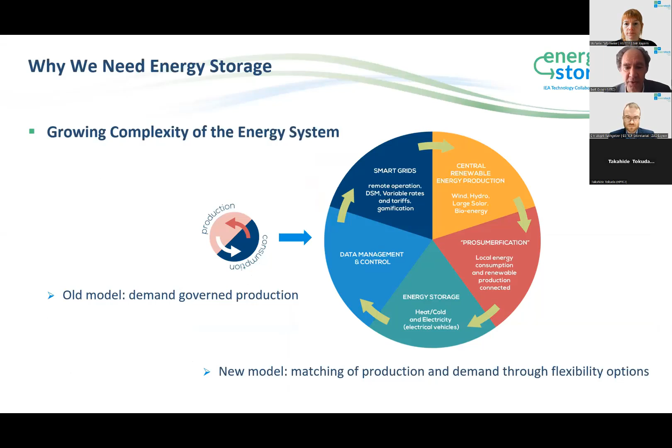The result is that today energy storage gains in value, and as we all know, as something gains in value, it also attracts more scientific, public, and luckily also political interest. So we will evolve to a more complex energy system. A system coming from production follows demand to a system where flexibility is key, and where storage is at the core of this new energy system.

We have batteries, we have water boilers, so most people say, what's the problem? Aren't we then ready for this new, more complex energy system? Or are we still facing some challenges? And indeed, there are still a lot of challenges. Here, I will mention some technical challenges, just a couple of them. If you look at the more technology-specific challenges, independently of which type of storage we are using, we have a lot of challenges related to the compactness of storage. We have challenges related to charging and discharging capacity, to safety aspects.

Even this week, I saw some pictures of burning cars, the problem of the lithium battery. We are talking about sustainability and the discussion on rare materials, the mining of the materials. We are talking about circularity, so a lot of challenges ahead. There are also challenges related to the optimization of the grid infrastructure, where storage can play a major role, if you look at demand response and at the bidirectional communication which is needed, as storage is part of the energy system.

And of course, we all know the Internet of Things is growing, artificial intelligence becomes part of our daily life. So also here, it gives us extra possibilities for the integration of storage into the energy system. And last but not least, the whole flexible sector coupling, where electricity meets heat, where electricity meets transport, where heat meets transport, and vice versa. So a lot of challenges ahead of us.

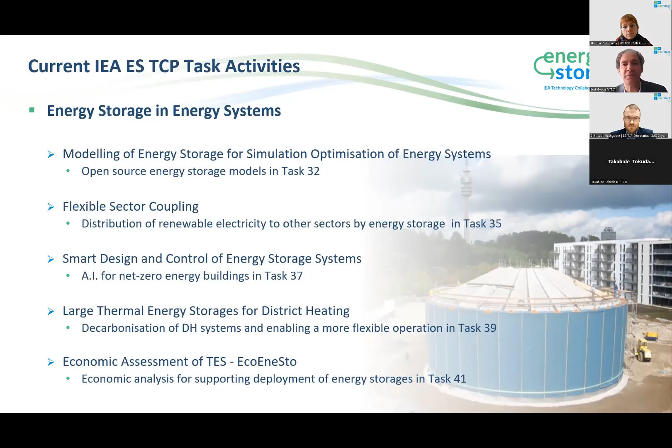Task 39 goes on large thermal energy storages for district heating, and it's about the decarbonization of district heating systems and the enabling of a more flexible operation. And last but not least, task 41 is about the economic assessment of thermal energy storage. EcoEneSto is the title, so it's about economic analysis for supporting the deployment of energy storage.

We also have 4 tasks related to technology improvements. One of them is the comfort and climate box, where we bring together heat pump and storage. It's task 34, and it's also task 55 of the heat pump technology TCP. Another one is task 36, where we look to Carnot batteries, and we go for looking for an inexpensive site-independent storage of electric energy by use of the Carnot batteries.

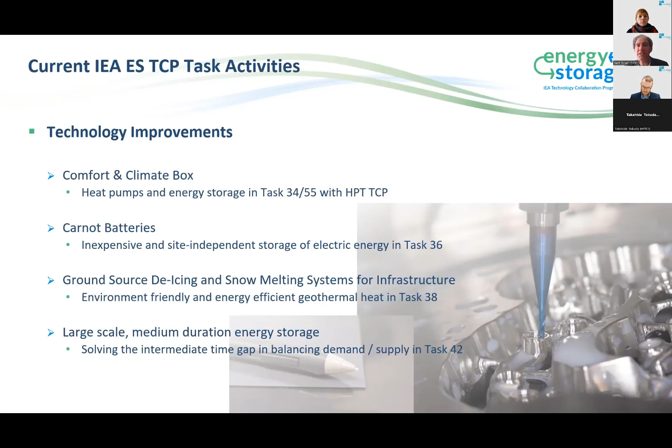Task 38 is on ground source de-icing and snow melting systems for infrastructure, where we try to use geothermal heat in an environmentally friendly and energy efficient way. And task 42 is about large-scale, medium duration energy storage, where we try to solve the intermediate time gap in balancing demand and supply. And our last current task is task 40.

It's related to materials and components, and we look there for compact thermal energy storage materials within components, within systems. It's about PCM and TCM development and standardization. And here it's also cooperation with the solar heating and cooling TCP.

As mentioned in our mission, we want also to disseminate all the results from those tasks as much as possible. And one of the means is the Enerstock conference, as already explained at the beginning of this presentation. It's a triennial Enerstock conference, and this one, online for the first time, is also one of the means to disseminate our results.

And we also promote the active participation of all experts in symposia, workshops, webinars, and we have our own online seminar series. So every month we try to have an online seminar.

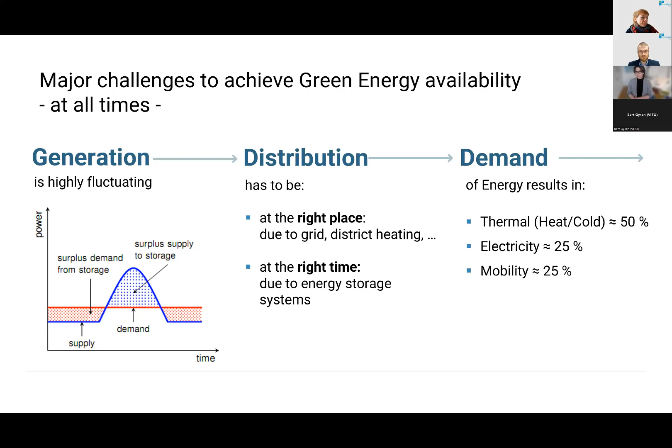And so, which is also an important point here, which is stressed: energy is not basically electricity, as we all know. The majority is just thermal energy, which is about 50%. And so this is a very important point. I'm telling investors that the solution to green energy availability is energy storage systems, because they are key in matching supply and demand so that you have the energy available when needed.

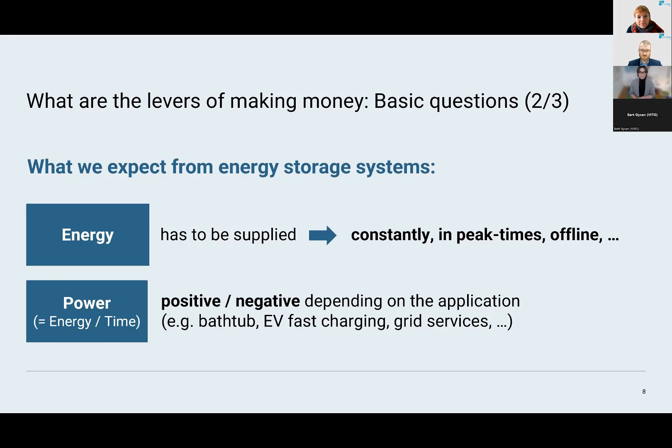So what is the second important point? What do we expect from energy storage systems? There are 2 things. The one is energy. Of course, we want to have it constantly at peak times. And the other thing is we need the power. We want to charge our cars fast. So we need some kind of buffer batteries. And so here are the examples that you have, a bathtub, etc.

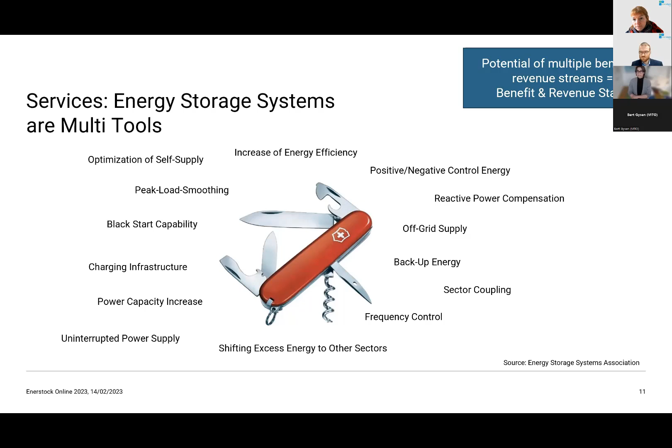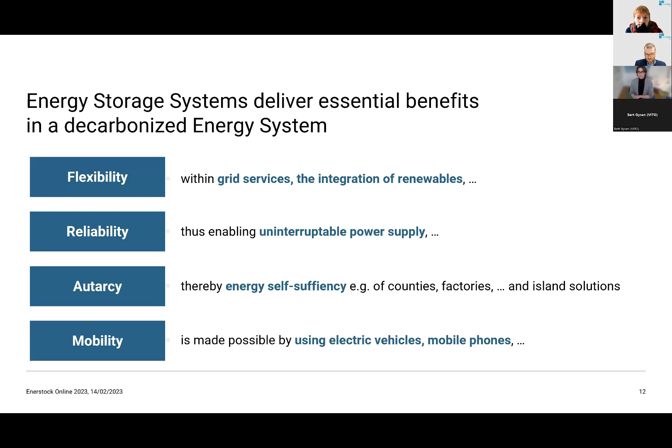So which actual services and benefits can be identified? I think you might know the Swiss pocket knife. And so this is the great thing about energy storage systems, because they are multi-tools. And this is also the good thing, coming back to business cases: you have potential for multiple benefits and revenue streams. So at one glance, there are lots of benefits delivered by energy storage systems. You have the flexibility, you have the reliability, you get also autarky, and of course mobility: we couldn't use electric vehicles or mobile phones without batteries.

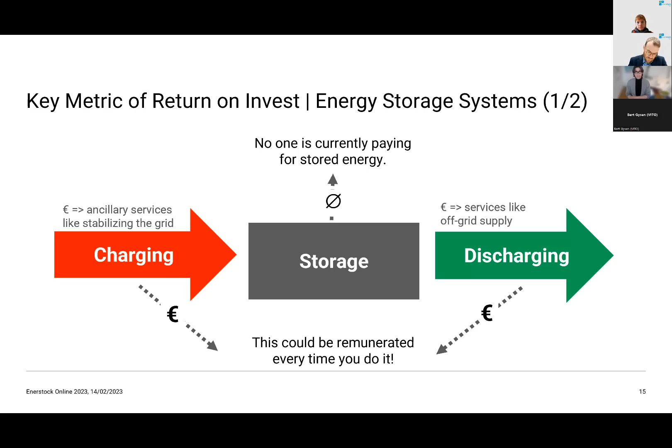So when do we make money from energy storage? It's basically the 3 things. You make money by charging, and you make money by discharging, and in the optimal case it's a circle. So when you have discharged, you're charging again. At the moment, we do not have a business case for just energy being stored. You get money either when it's charged, maybe for ancillary services like stabilizing the grid, or, of course, for discharging the energy.

Maybe this is just a very simple overview, but I think it explains pretty well what long duration means. If you have a low frequency in your charging process and in your discharging process, you need to have a really value-for-money or inexpensive storage so that you have a proper return on investment.

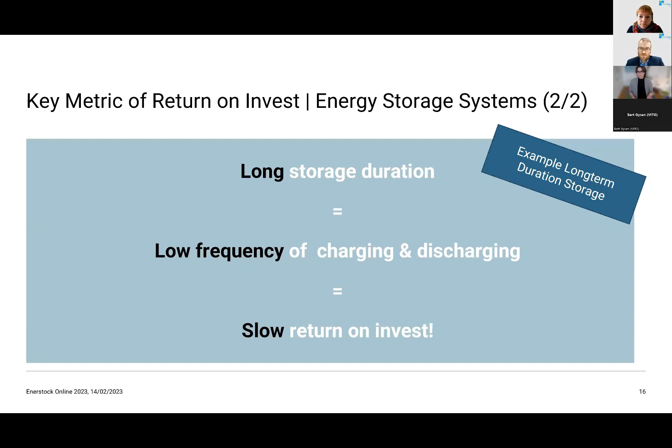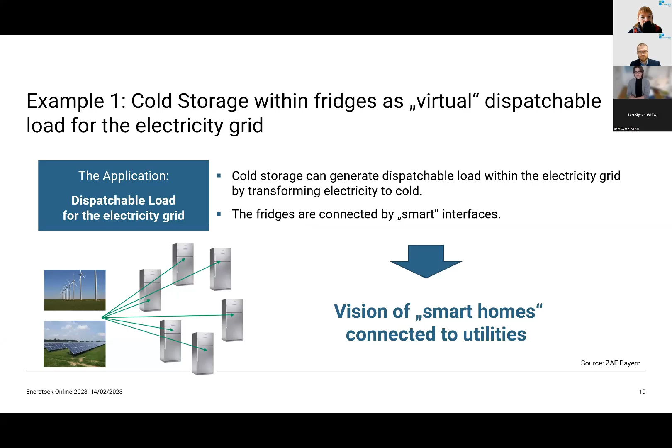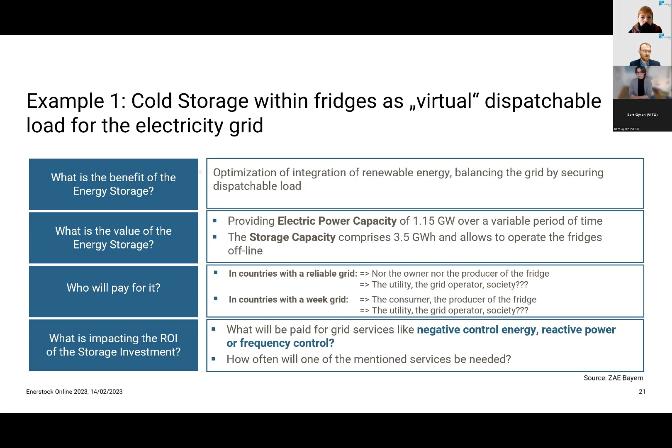So then we come to crucial questions. What is relevant from benefit to business case? Those are 4 questions. I give examples here. For example, you see here a really deep tech, great vision: the vision of smart homes connected to utilities. We have something like 40 million fridges in Germany. And if you would connect them with quite inexpensive cold storage, you could provide a lot of electric power capacity of over 1 gigawatt. The thing is, you have to ask the question, who will pay for it? At the moment it's quite difficult: the owner doesn't pay, nor the producer of the fridge.

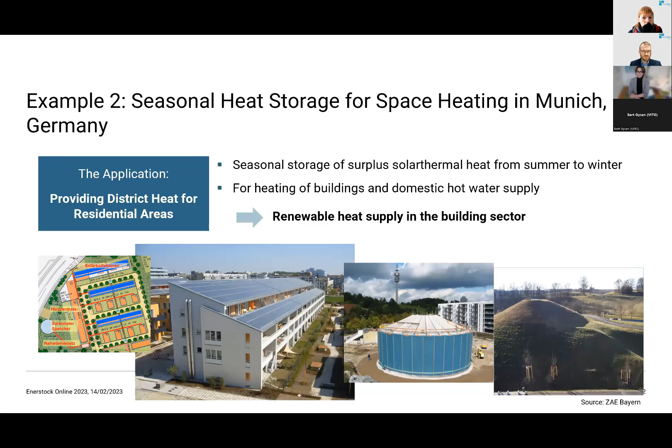So I've brought a second example, and Bert also has shown this as one of the working groups. It's a seasonal heat storage for space heating in the north of Munich. This gives a really good example. This is not really deep tech, but it's actually working. You have a heat and domestic hot water supply for 320 apartments, and get at least partly autarky by having this heat storage.

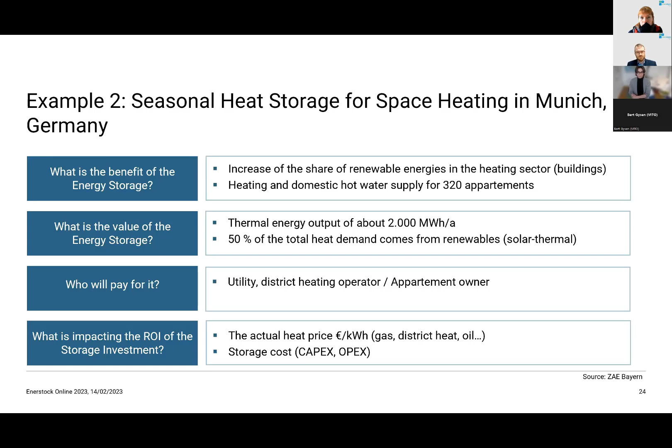All right, so here, this is from benefit to business case. Again, a quite important slide, because the application and its usefulness is key from a customer perspective, because ultimately the technology needs to match the application. So this is always the thing to have in mind. It's the triad: what's the application? What technology matches the application needed? And so you can quantify and qualify the concrete benefits.

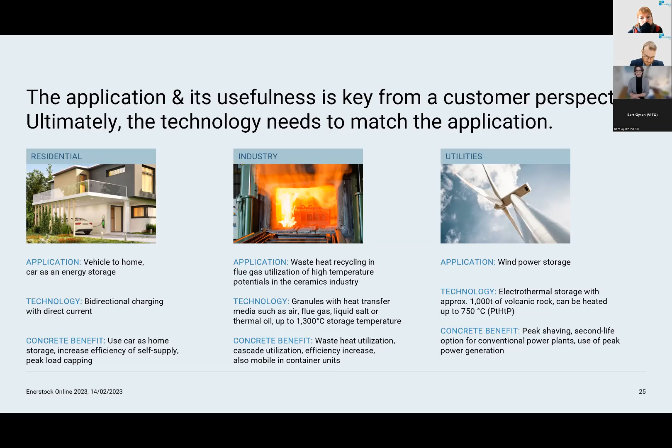Yeah, having it at one glance, the return on invest, of course, depends on the number of charging, discharging cycles per time. And then always think energy storage within applications. Only then we can quantify the value of energy storage.

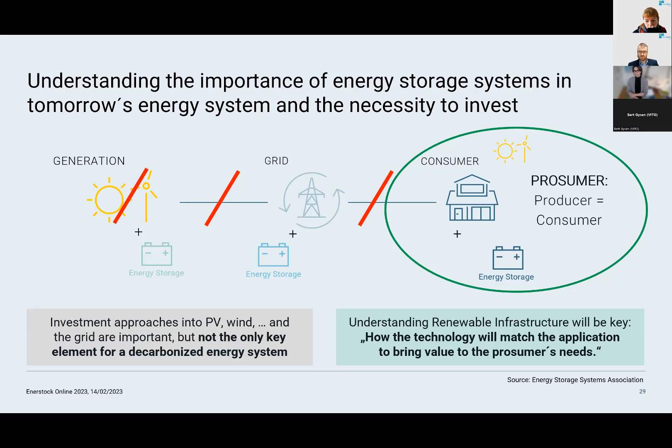So that exactly brings that what I've told before. How will the technology match the application to bring the value to the prosumer's need? So, and here, maybe we also heard it in the keynote from Bert. The ultimate goal is just to get a decarbonization in combination with security of supply and thus energy autarky at stable cost. And there is a multitude of energy storage opportunities with high investing potential in tomorrow's energy system. So there is a huge market in the industry and in the commercial area.

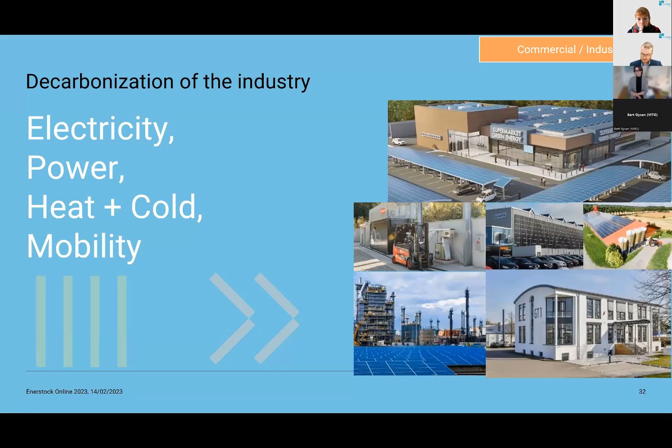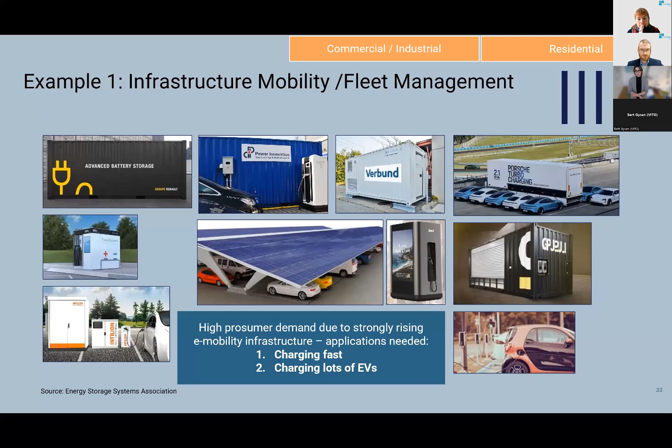So we've heard a lot about electricity, but now the thing is how to get the power you need and the process heat, etc., the heat, the cold, the mobility concepts. And so this is with the strongly rising e-mobility infrastructure. So there are a lot of startups, joint ventures like Numbat, Jolt, where they make deals with retailers, how you charge your cars A, fast, and B, how you get the possibility to charge your electric vehicles with green electricity.

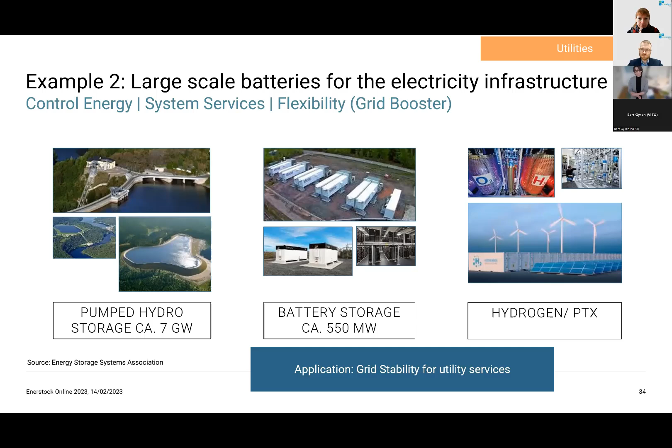So another example of the application grid stability for utility services is, of course, you have big pumped hydro storage and you have battery storages. We will hear a keynote from Fluence later on, and of course you have power to X and hydrogen as a good energy storage system as well. So here, this is one example for a grid booster concept in Germany. And so there are many more investments to come like those stabilizing the grid.

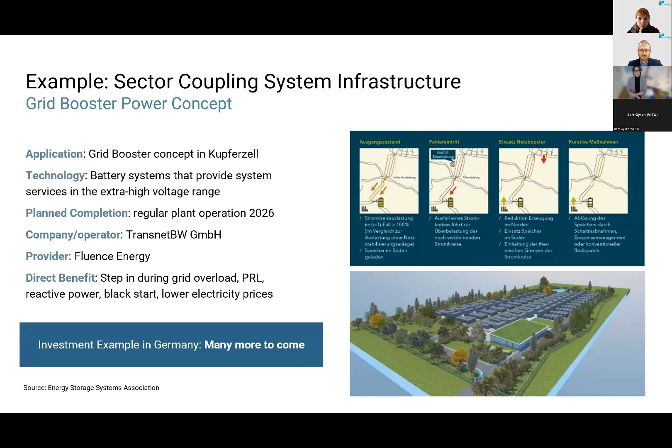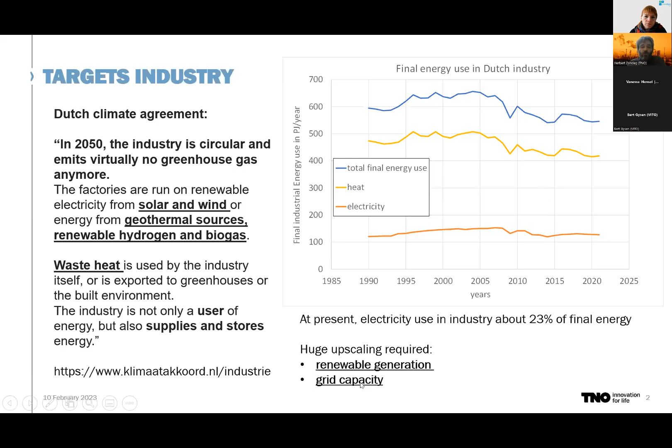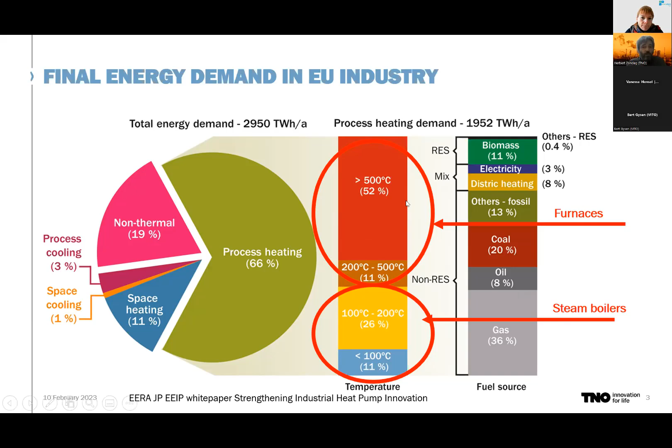Now let's have a look at the industrial heating demand. So over here you see the final energy demands in the European industry, and we can see that most of this energy demand, as expected, is related to process heating. And typically, in the order of 1/3 is below 200 degrees, mainly provided by steam boilers, industrial steam, and 2/3 is above 200 degrees, mainly provided by furnaces. So all this heat would then have to be electrified, and for low temperatures one of the interesting options is industrial heat pumps. For high temperatures it would be more direct electric heating.

So what does that mean for heat storage? Well, energy efficiency is a requirement for electrification of industrial processes. As we have just seen, we need huge upscaling, also in renewable capacity availability. Since renewable availability will be a limiting factor in the end, we need to be efficient using this energy.

We will have grid capacity constraints, and also there's the issue of competitiveness with countries having cheaper solar and wind. So also a good reason to be energy efficient. So on one hand, we need energy efficiency to reduce energy use. And important topics there are, for instance, waste heat recovery and reuse, so to minimize the amount of waste heat.

And we can do that by, for instance, short-term heat storage applied to batch processes, so we can store the heat of one batch, upgrade it with a heat pump, and use it in another batch. Or preheating of batches, also requiring heat storage. Also, if we want to use waste heat to be provided to district heating, we would have long-term storage connected to this district heating system to do this in an optimal way.

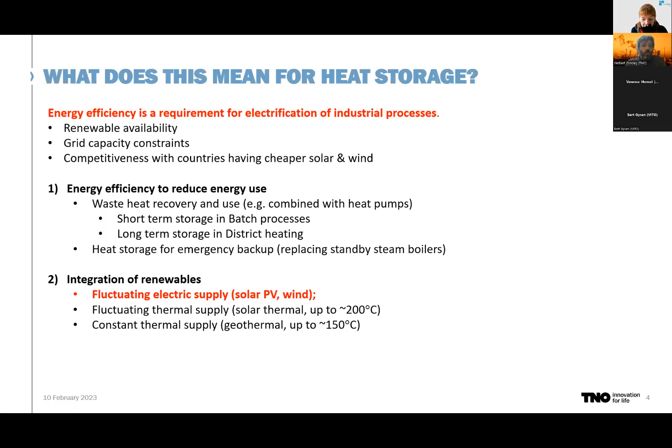And if we look at renewables, that will be first and foremost power to heat, converting fluctuating electric supply from solar PV and wind. In addition, we will have in Europe some solar thermal supply, but probably not much in the Netherlands or in the north. And we will have constant thermal supply from geothermal. That also requires storage if you want to match it to fluctuating thermal demand in processes. So we see a lot of roles here for heat storage.

Now, what options do we have for heat storage? Well, this is just a very basic slide. So over here we have temperature range, different types of heat storage: sensible, phase change, so storing in a melt solidification, sorption heat storage, thermochemical, and chemical heat storage.

If we look in terms of TRL, we can see that sensible heat storage is quite well developed and is applied on a significant scale in the market already. That can relate to liquids, so heat storage in water, thermal oil, molten salts, but also solids going to much higher temperature, to 800 degrees. The other types of heat storage are still at lower TRL.

We are doing work, among others, on PCM heat storage, sorption heat storage, where hydroxides can provide high temperature heat, and chemical heat storage. And chemical heat storage is, among others, related to renewable hydrogen and fuels derived from renewable hydrogen, such as ammonia, or redox heat storage.

This redox heat storage, I'd like to say a few words on, because I think it's an interesting technology. So basically, what we have is metal oxide powder, for instance, iron oxide. We can reduce that to pure iron by renewable hydrogen and renewable heat provided from power to heat. And this iron powder we can store for whatever time we want. And if we need the heat, we can combust the iron powder, providing heat to our required applications.

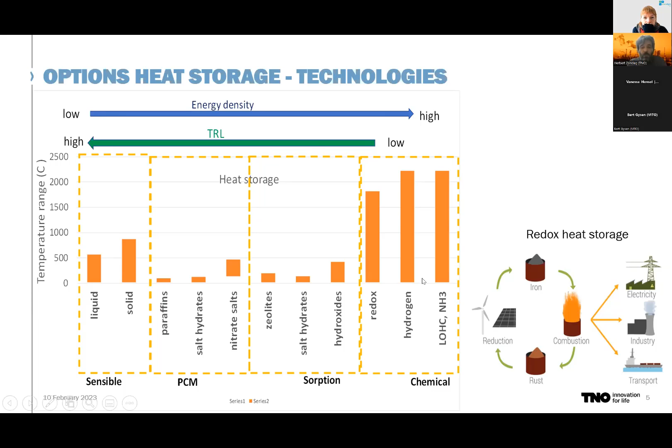One of the topics we are working on at TNO related to energy efficiency is this example of industrial steam storage. So over here, it's a PCM heat storage. The purpose of this PCM heat storage is heat recovery from exothermal batch processes. So we recover this heat, store it in the PCM. When needed, we use this charged PCM to be discharged producing steam, low pressure steam that can be upgraded with steam compression.

Over here you see the storage. Within the storage we have a large number of tubes, as also shown over here. And these tubes are filled with phase change material. The phase change material used as storage material gives a good match with the generation of steam at a constant pressure and temperature. So PCM and steam are an interesting match.

We use adipic acid in this material, melting at 150 degrees. We can charge this by low pressure steam coming from the exothermal batch process. And if we discharge it, we flow a water film around the surface of the tubes. The water evaporates, producing low pressure steam that we can upgrade with this steam compressor.

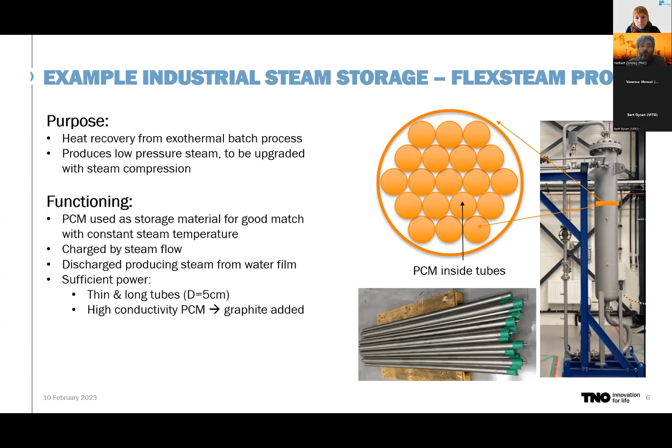Another type of project is related to this integration of renewable electricity. And that is something we looked at in the SPOT project, trying to answer the question how much generation, conversion, and storage is needed to cover industrial heat demand fully with renewable electricity, just as a kind of limiting case to get some feeling for order of magnitude.

So we made some assumptions regarding the industrial heat demands. So it has to be met fully by renewable electricity from solar and wind. And the demand itself is constant over the year. So we have a fluctuating supply and a constant demand. So how much storage capacity do we then need?

I'm not sure if everybody can see my pointer.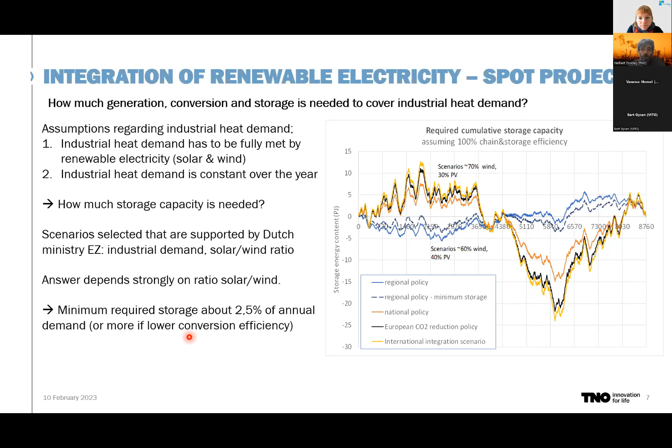So from this information, we try to calculate the costs of such an energy system. So what we did is we compared different conversion and storage routes. So to explain, suppose you want to go from electricity to heat, you can store the electricity and then discharge the storage to provide electricity to a heat pump that we can use to provide the heat.

Or we can have the electricity converted to hydrogen, store the hydrogen, combust the hydrogen, and thereby provide the heat. So we have different conversion and storage routes. There are a lot more, but these are just two examples. And over here you see the different conversion and storage routes that were investigated. We have two cases: below 200 degrees, because there we can use heat pumps, and above 200 degrees where we cannot.

What we saw is that the total costs to provide the Dutch industry with this electricity for heating strongly varied, depending, first of all, on the selected conversion and storage technology. Secondly, on required infrastructure, whether it's a hydrogen network or an electricity grid, the electricity grids being a lot more expensive for a given power than the hydrogen network. And also the conversion efficiencies, because if we have a lower conversion efficiency, it means we need more renewable generation, which comes at a cost.

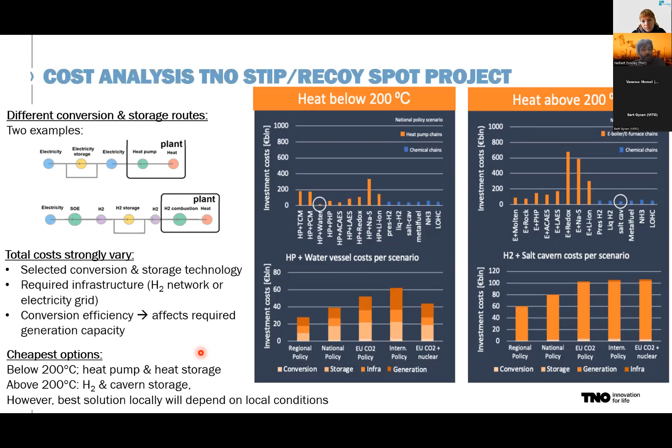So comparing all these options, what we saw is that the cheapest options were, below 200 degrees, to provide this heat by means of a heat pump and heat storage, and above 200 degrees, use hydrogen and cavern storage. However, these are two generalized solutions. What is the best solution in an individual case will depend on local conditions. And how important these local conditions are is also illustrated a bit by the next slide.

These are current developments in the Netherlands. What we see is that the start of electrification in the Netherlands is presently hampered by grid capacity constraints. If you look at this map of the Netherlands, the yellow parts have a risk of transport constraints. Orange is structural congestion announced, and red is structural congestion already there and no new transport requests are possible. So we see that there is a lot of pressure on the electricity grid at the moment, and we still have to expand towards power to heat.

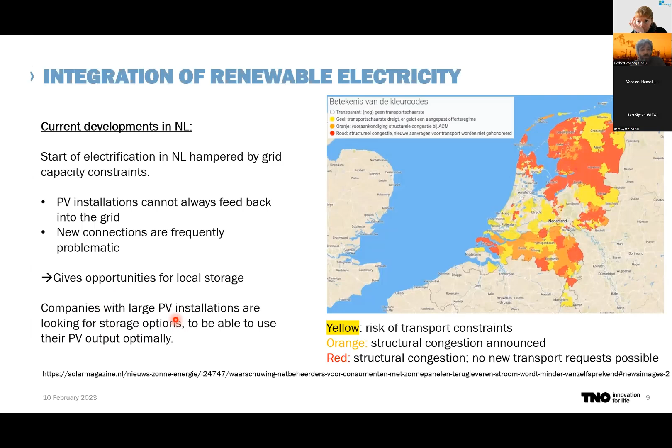However, what we also see is that this already triggers questions on heat storage. For instance, we sometimes see small companies having large PV installations who cannot feed back their electricity to the grid. And we get questions on whether it is possible to use this electricity from the PV, for instance in weekends when the production is not running, and store that, for instance in heat storage, so that we can supply it again during the week. So already here, these grid constraints trigger questions on storage.

So, conclusions. A large increase in industrial electricity use is expected because of the industrial electrification that is coming. That will be in different forms: industrial heat pumps, direct electric heating. By industrial heat pumps, I mean heat pumps going up to 150, 200 degrees, upgrading waste heat to process heat. Direct electric heating for higher temperature processes, and also mechanical drive. Well, for heat pumps and direct electric heating, we will need storage to integrate it properly.

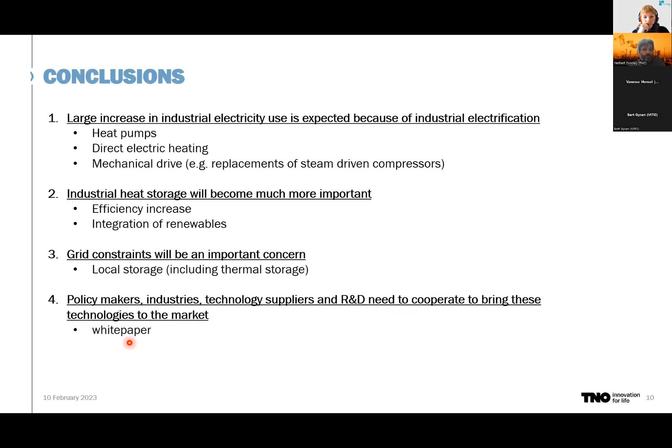Then industrial heat storage will become much more important because of efficiency increase and integration of renewables. Grid constraints will be an important concern, but also give opportunities for local storage, including thermal. And policymakers, industries, technology providers, and R&D need to cooperate to bring these technologies to the markets. And therefore, in EERA, a white paper was written by, among others, TNO, but also several other institutes.

Well, I will not go into all of them. We also have technical and business recommended actions, and those can be found in the white paper. And over here, you see the link to the white paper for whomever is interested. And that's what I wanted to say.

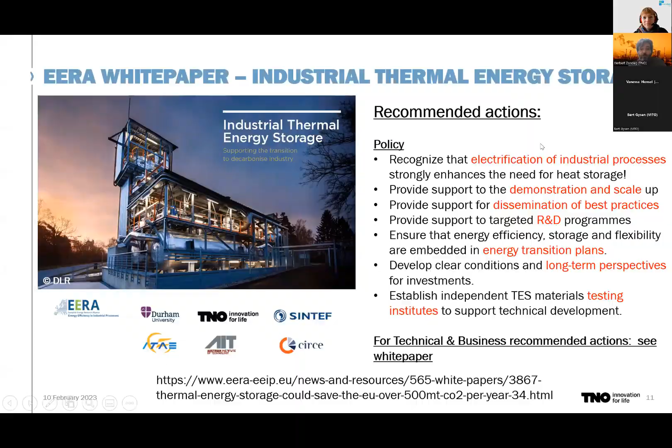So, sorry. Now I should be unmuted. I had to find where the unmuting button was after sharing the screen. Thanks, Stephanie, and thanks for the invitation to speak at today's Enerstock conference about the value of storage.

And over the next 50 minutes, I want to talk about the economics behind large-scale battery storage. This is, in principle, globally applicable, but I will do it based on the very specific German market to highlight developments that we're seeing in markets around the world. Regarding myself, I'm responsible at Fluence, as part of our growth team, for the German, Belgian, and Dutch market, and also for battery storage for transmission system operators in the EMEA region. And this is what I want to talk to you about today.

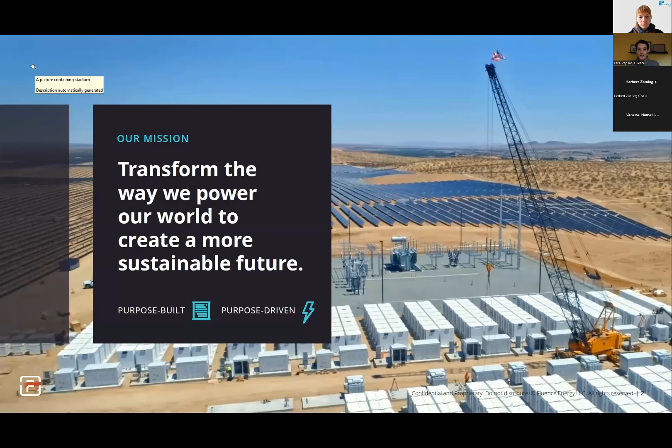So very quickly about Fluence: our mission is to transform the way we power our world, and we want to do that by integrating storage into electricity grids. What you need to know about us: we're a global market leader for energy storage products based on battery technology. We have about 5.5 gigawatts of battery projects deployed or in deployment globally, and more than 1 gigawatt of those are in Europe. In Germany, we have about 350 deployed or under deployment.

So quickly, why do we look at battery energy storage only? Because it's a huge growth sector. This is a graph from Bloomberg. You see we're down here at the moment in the scale of the battery storage market, and we really see it go up tremendously over the next decades. And one thing to always remember is the scale that the global battery storage market will have in 2040 compared to today. We are only at, I think, 6% of where we will be in 2040. So we have a great journey ahead of us.

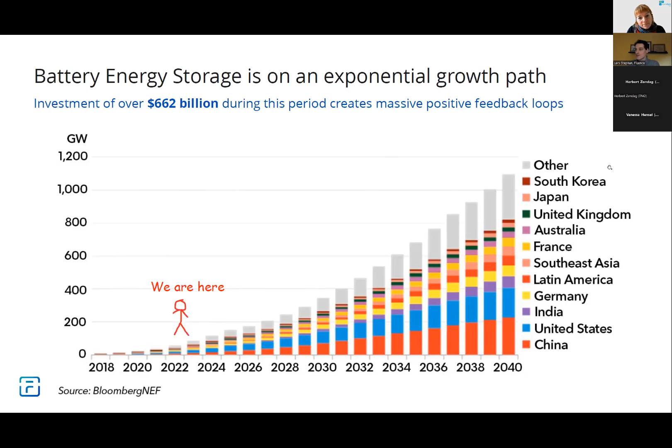But the question is, of course, what will battery storage do in electricity grids? And how is this changing from what we all know about battery storage today? So let's first take a step back. What are actually the drivers? This is just a very general overview. We do, of course, have a lot of policy drivers, from renewable targets and renewable integration targets, specifically in Germany but in other countries as well. We're looking at the phase-out of nuclear and coal generation.

So we are generally on a move away from thermal power generators to renewables. And this comes with a challenge that Vanessa had mentioned before already as well, that we need to move energy around from time of generation to time of consumption.

On a policy landscape, we do, of course, also see a lot of movement in enabling this transformational change that we're seeing in our electricity system, with market reform being debated on European level, on German level. Specifically in Germany, we're looking at price zone split, so basically providing more locational signals to energy prices in the market.

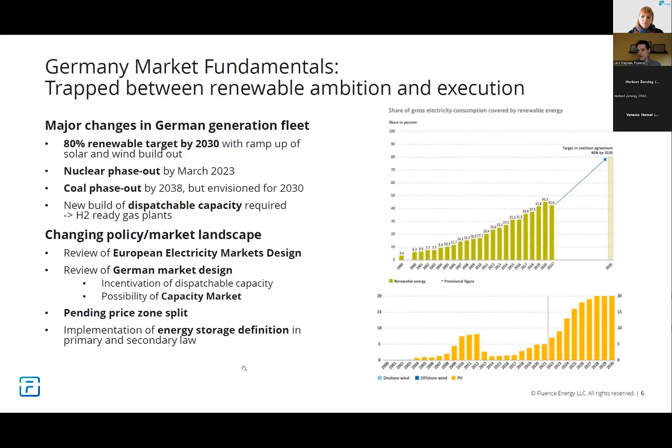Mega projects differs. So in the UK, I think we see 400 megawatt projects being built. So in Germany, we're getting to a place where we see 100 megawatt block batteries being built into wholesale markets. And this is really a bit of a transformational change from where we have been in the past.

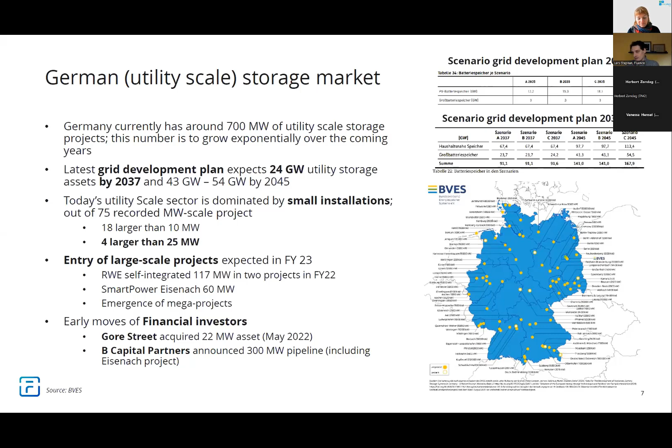This trend is also, by the way, underlined, which is quite interesting, in the scenario planning of the German grid operators, which was approved by the German regulator, where 2 years ago they had expected only about 3 gigawatt of battery storage to be part of the German electricity grid by 2035. And they went from forecasting 3 gigawatt of battery storage to around 24 gigawatt of battery storage to be integrated in electricity grids in Germany in 2035 or 2037. And the key driver behind this is the integration of storage into wholesale markets.

So when we look at battery projects in Germany, traditionally, they have been mainly active in what we call FCR and FRR, which are frequency regulation products. So these are batteries which will have to react within seconds to keep the power grid stable, to keep the demand and load in balance and the frequency of 50 hertz stable.

And these ancillary service markets, frequency regulation products, are typically, we have seen that in many markets around the world, the first wave of battery storage projects coming into a market, because these very fast response requirements are a perfect fit for batteries. However, this is, I almost want to say, a niche market. It has a limited cap. It can saturate very quickly, and that's what we've seen in Germany as well, this market segment saturating.

So we're also in Germany now seeing a move into wholesale market products. So just here to compare, the balancing markets is a service that is provided by system operators. And we're now moving into the wholesale market which has much larger volumes, where we go into spot market trading and day ahead and intraday auctions. And I'll talk a bit more about those in a moment.

Why is this relevant? We saw before this pocket knife, energy storage being the Swiss Army knife of the energy transition, a graph created by the German Storage Association, BVES, and I think Vanessa used it before as well. The key for storage to be deployed in different market segments is their capability to stack different revenues on top of each other. So energy storage being able to provide frequency regulation when prices are good there, but also to move into other applications when prices are good there as well.

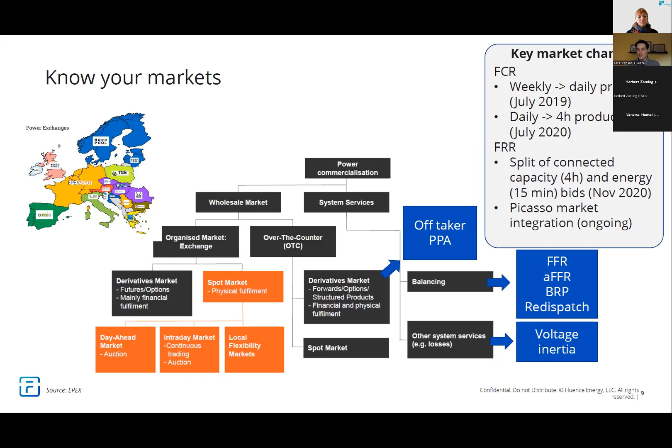And there we've actually seen key changes in the market for frequency regulation in Germany and across Europe, where previously you would provide frequency regulation for 1 week at a time. Now you can provide frequency regulation for 4-hour blocks, which provides much more flexibility for storage to enter other markets.

Again, why is this relevant? Because now we actually have a number of different market products that energy storage can bid into. You see they have different market volumes. So the frequency regulation products have about 600 megawatt. And if we go into secondary frequency regulation, the aFRR, we talk about 2 gigawatt of volume. But then if we look into wholesale market trading, we're getting into gigawatt hours of volume traded every hour.

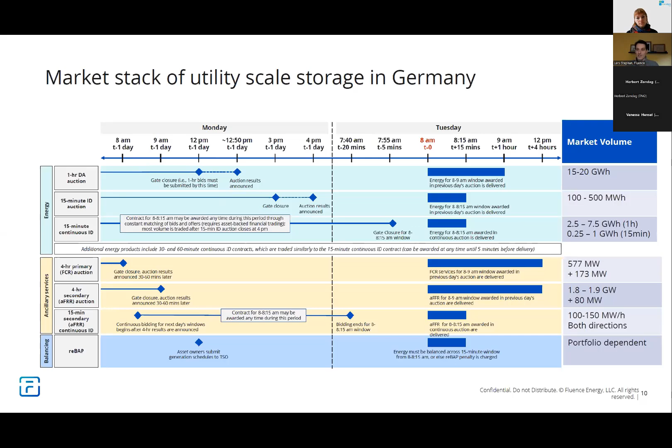And this is like the scale and the size of markets in which energy storage can make a real impact and a real potential. So what does this mean, energy wholesale trading? Energy wholesale trading, and we have touched on it before, is trading energy on the spot market, where you get a price signal for what electricity is worth.

In the morning, when people start to wake up, switch on their light, industry processes ramp up, electricity gets more expensive. During the day, when solar is generated, prices go down again because we have a lot of volumes of cheap renewables in the grid. And towards the evening, when the sun goes down, people come home, we see peak electricity demand, prices go up again. So this is how typically wholesale prices behave.

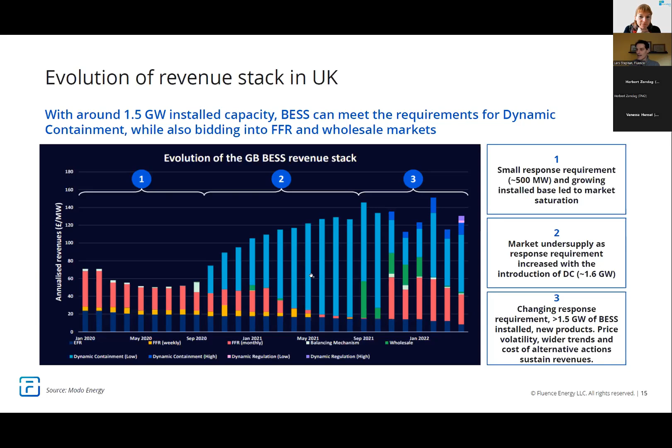This is actually also an interesting graph. It's a graph from the UK, how battery storage assets were traded in the UK. The UK is a bit further ahead of the German market in the sense of the kind of products and multifunctionality of products they have. And basically what you can see here is that there are certain revenues which are stable over time, and other revenues go away and are being replaced by others, but the overall revenue level is stable.

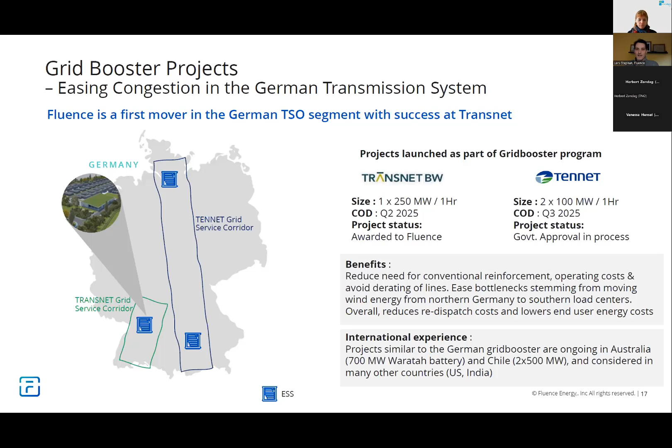Just a quick note on large-scale storage as transmission asset. Vanessa had already mentioned it, the grid booster projects in Germany, which have a different fundamental business case here. It's an asset that is owned by the transmission system operator, and it's used to reduce grid congestion cost. So it's not traded in the market, but again, a different example where energy storage, in this case as part of the transmission grid, creates great economic benefit for ratepayers, and therefore for us all as we pay our electricity rates.

And just another step, so TransnetBW, and then there's another grid booster project for TenneT to be awarded, are not singular events, but we see similar projects taking place in Spain, in the UK, in the Baltics, and outside of Europe, in Australia, in Chile, in North America. So a lot of interest in that.

And a very quick final note, even though we see the storage market getting stronger and growing consistently, we also think that there is need for market design reform to better recognize the role of energy storage and secure investment into energy storage. We'll not talk about it in detail. We just had the European Electricity Market Design Reform consultation from the European Commission, which basically asks what the next steps should be in defining how electricity markets in Europe work. We made a proposal for a volatility CFD, which is focused on securing stronger investment into energy storage as technology.

So just to say, the storage market is great based on the fundamentals that I showed before. In order to bring enough storage into the markets to properly integrate the renewables that we're building in Europe, or that we're planning to build in Europe under REPowerEU, we probably need much more storage than we're currently building based on market drivers. So we believe we also need to think about market design. How can we get more investment into energy storage? Maybe somebody has a question around that later.